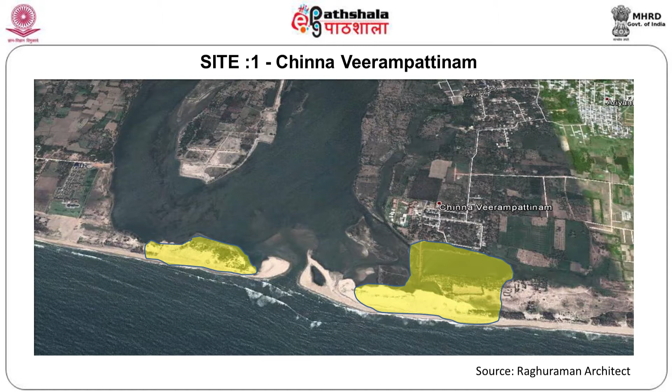Talking about eco beach development, number 1, Chinna Veerampattinam. You can see the Google map of how it is there. Wherever it is colored yellow is phase 1 of the project, and you have backwater getting inside.

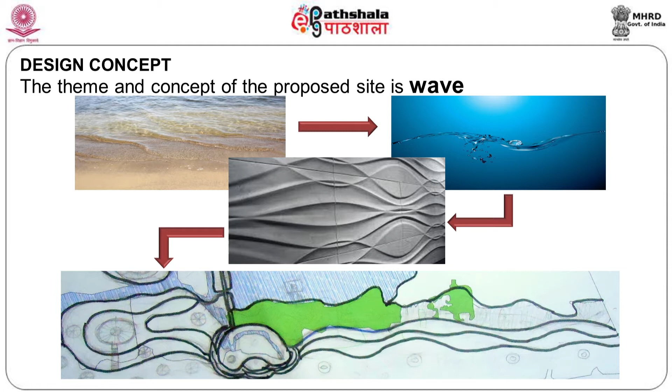We have different themes - whenever we talk about a project we have to have some kind of theme to sell your product. So here we have taken the wave as a theme, and all the designs need to be in the wave pattern. You can see the design concept in the wave pattern worked out on the spaces available for us.

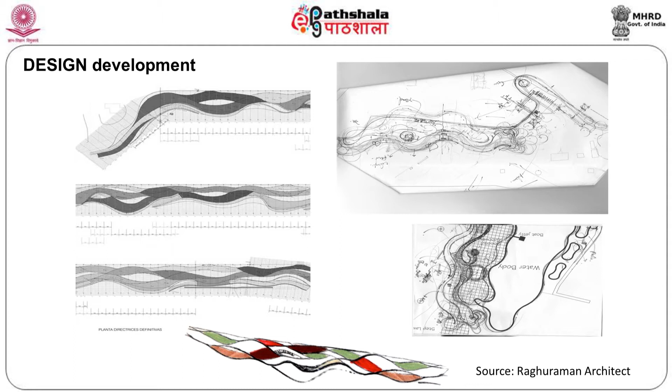The elements we have introduced are entrance plaza, lifeguard station, changing rooms once you have a bath or wet yourself in the sea water, rain shelters, toilets, comfort rooms, stepped lawns, and extension of coconut groves.

There is a watchtower for people to watch the beach, and a hanging bridge to connect to different areas. Sculptures are there, retaining walls to hold the soil, gabion walls to protect against sea erosion, and pathways. The gabion walls protect against sea waves hitting the land, and then you have pathways.

This is the design intent. You have a small lake available after the backwaters come inside, so there the wave will not be strong - it's a safe place for people to have a bath, swim, and use a boat jetty and boating facility, so the wave speed will not affect the people.

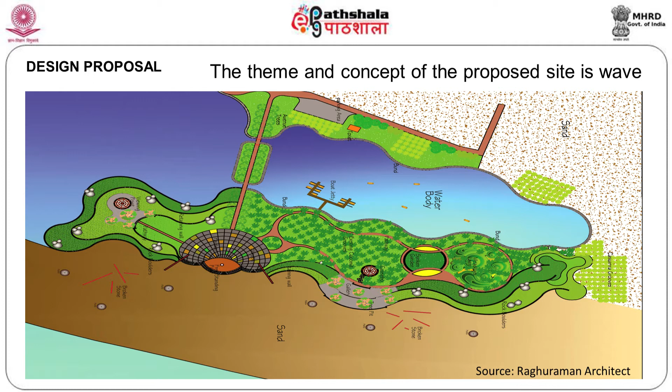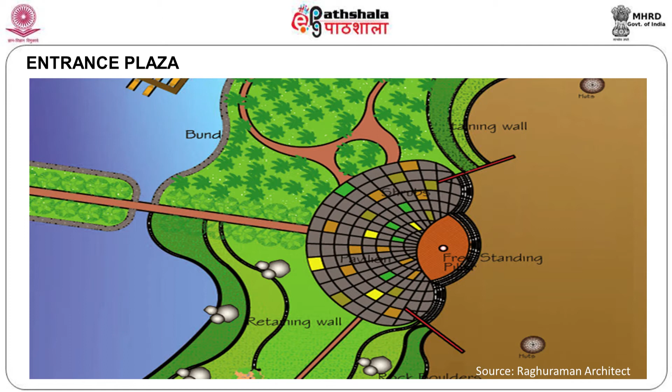These are all the details provided as a master plan - different pavement, different angles, everything given in a wave pattern. Boat jetties and coconut groves - plant coconuts in a proper signature pattern so you can see them as a grove growing up.

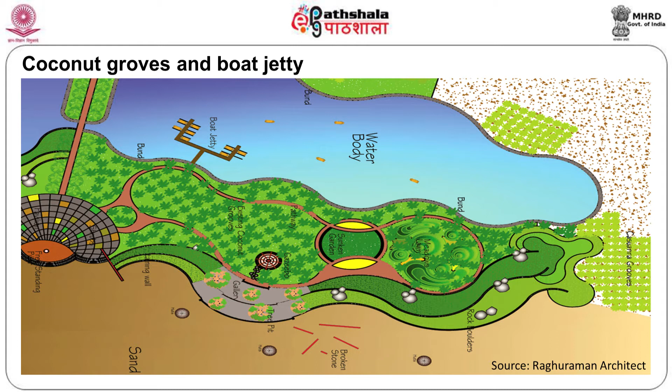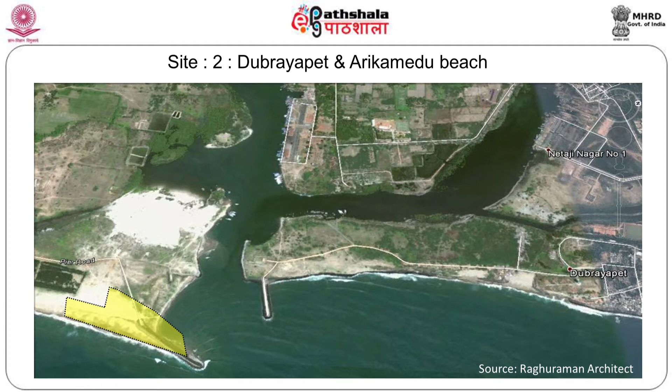The next site we are talking about is Dubrayapet and Arikamedu beach - both are interconnected. Again, all the beaches are near the backwater entry into the city. You have some gabion walls which will invite the water to come inside, or become a breakwater so that the wave speed may not be there inside the water body or backwater.

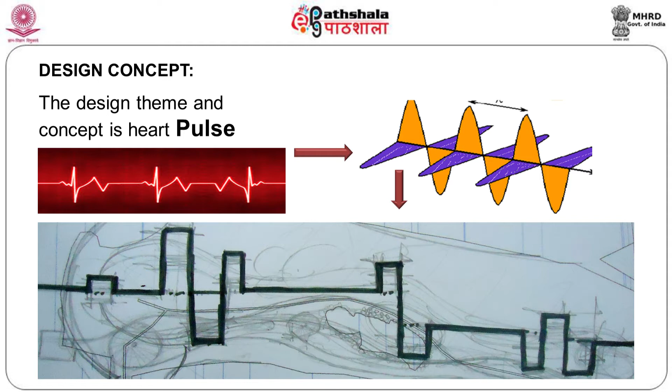Here we are talking about pulses - heartbeat rate as a concept. So you have up and down, up and down, like rhythms. You can see the concept being worked out on the same idea, with a hanging bridge and a gabion wall.

Then you have again lifeguard, changing rooms, rain shelters, washrooms, a raised garden, viewpoints, hanging elements. These are some of the things which come in everywhere, but how you design it at a different level is more important here.

You can see the details of design with a pulse pattern. Some more details here - this is the Arikamedu side, then the Dubrayapet side. This is the overall picture of how it will be developed.

Basically what is required, when you see the site, you should imagine what it can be at the future level. That is more important than just doing something which is not off the site. These are all things which need to be designed so they will be useful for the public.

More on urban planning, we have to think in terms of having a hanging bridge, different steps to climb up to different levels. You have greenery, gabion walls, and viewpoints. These are all the elements required in designing these kinds of beach parks.

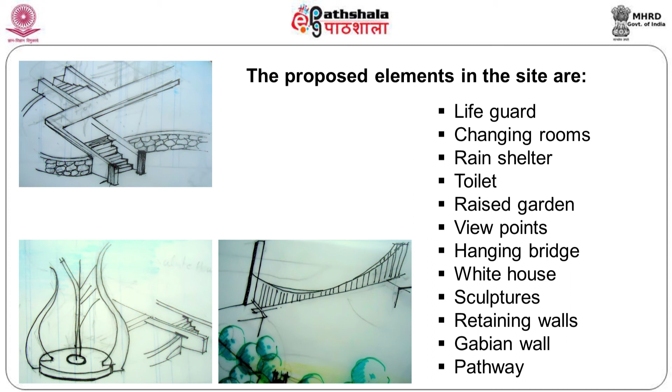We want to give a new look to the park. So once we decided to give a new look to the park, we like to have a free flowing pattern, is what the concept says. And how is your free flowing concept going to work on all the different 4 sections?

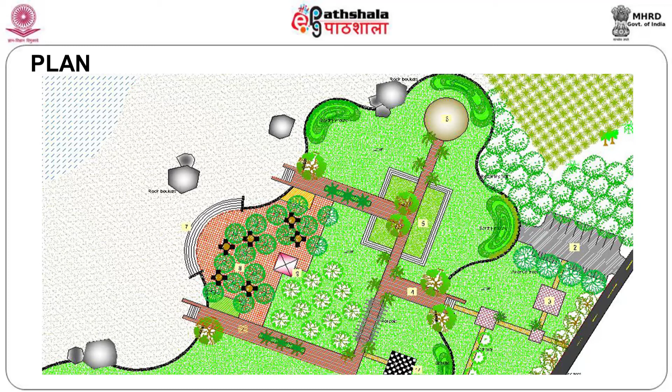This will have different zones for the different users: elders, children, and adults. So all the people activity are taken care of. So you have 4 different zones: adventure zone, gathering spaces, meadow lawn for seating purposes, meditation zone, and children's area for vibrancy.

Then finally we are coming to Chunnambar. That's another beach happening there, a long beach of 2 kilometers. So what are we going to do here? That's also very important. Have walking trails, and the phase is a natural trail, which is what we are talking about in this particular long stretch of beach.

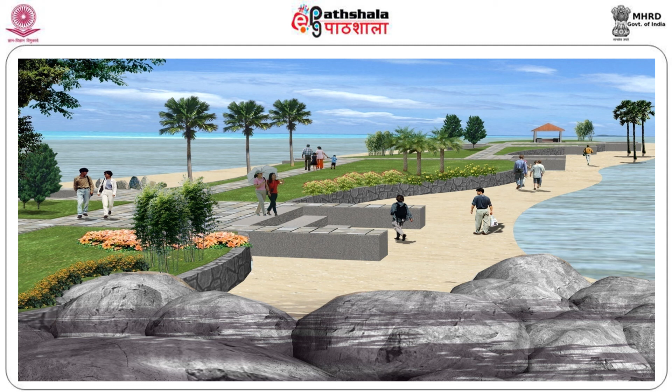So again you have walkways, children's play area. Children's play area is one of the very important things, so when children want to come to the beach, everyone will go to the beach. Otherwise, you go to the restaurant, use the bar or eateries, and come back without any activity. So here you have treetop walking, board walking, and rain or sun shelter.

Patterned lawns, individual lawns are available for the people. So all those things are available here. This is the design input of the free flowing walkway. The backwater is there, so you have boating activity taking place. Otherwise you can't have boat jetties on the sea because of the roughness.

And then you have a children's play area with stepping stones laid at different angles. Then viewing decks are provided. Basically, when we are doing a children's play area, you have to have a lot of creativity. How the kids will use it, how they will enjoy the place, plus your usage as per the site condition, and how long the equipment will last.

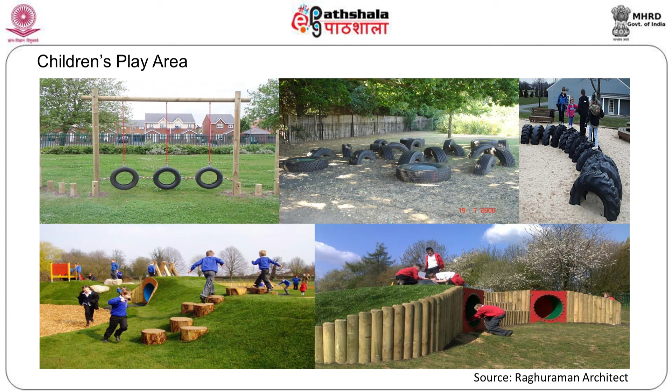We have to think in all these terms and then use them. For example, what I showed you first is basically what should not happen. The second one is better, you can buy old rubber tires from cars or tractors and bury them for the kids' play area, more interesting. And wooden logs, after the cyclone we have a lot of trees available, so you can cut them into different shapes and use them for climbing up and down, different activities for the kids.

Effective use of woods for a parking lot, play lot. You have a maze to get lost in, different types of mazes are there. Chessboard is there too.

Sculptures, stone sculptures, places can be allotted, and every time some sculptor will come and redesign the places. Sand sculptures, mural walls again.

Drinking water, very very important. We all have to forget those bloody PET bottles which are being sold. Our government has to provide drinking water everywhere. Only then will we not buy those bottles.

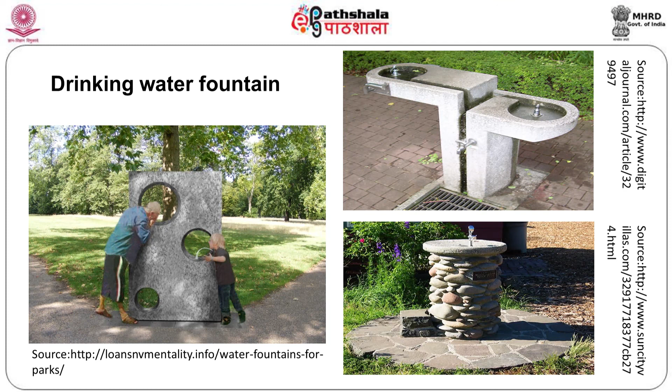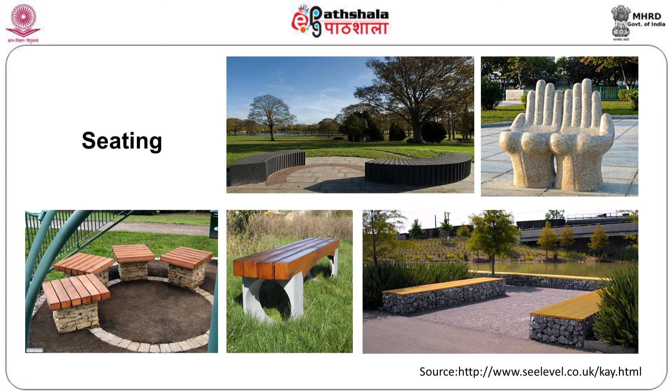Waste paper bins, dustbins, different ideas. Seating arrangements, again different ideas. Seating, again different ideas you have.

Lighting and furniture need to use cast iron, because near the coastal area corrosion will not take place with cast iron as fast compared to other materials. Totally diffused lighting and underground lighting, like that, you will have different lighting concepts that can be used, giving more vibrance to the place at night.

Trees, you need to use localized trees which will be tolerant to the salt spray.